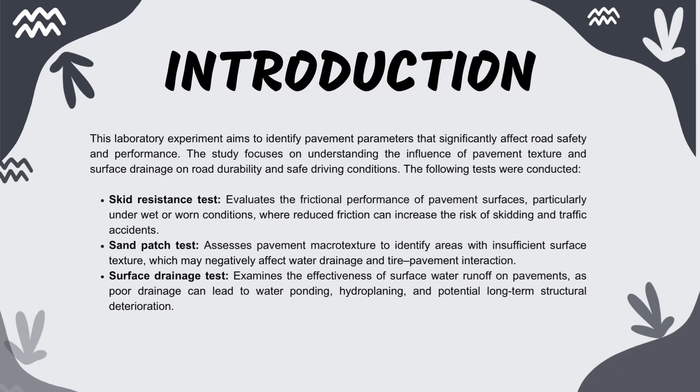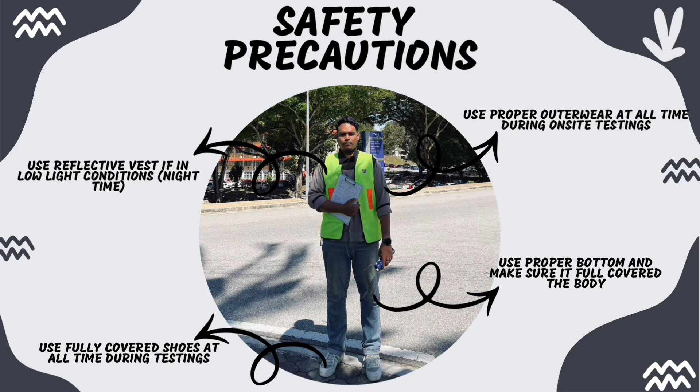This is a British pendulum tester. We start with leveling the arm of the tester and ensure the bubble is at the center.

Firstly, we need to calibrate the tester. Before we begin with our test, ensure the needle reaches 0 first.

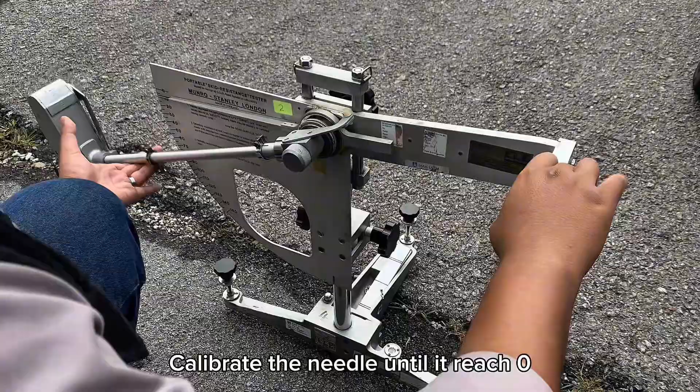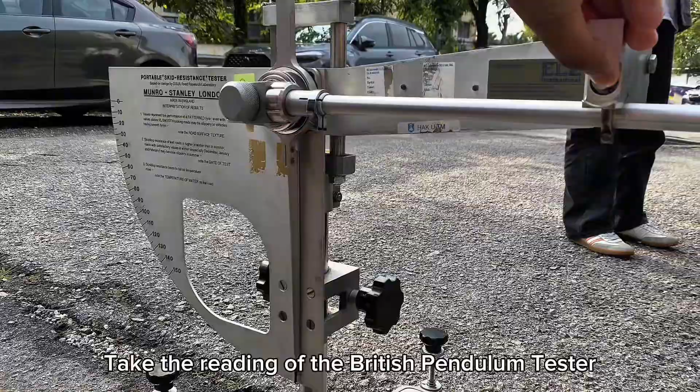Use the ruler to adjust the height level of the arm so it touches 3 points. We start with taking the reading of the British pendulum tester for 3 times on smooth and dry surface. And for wet surface, we pour water on the smooth surface before starting our test.

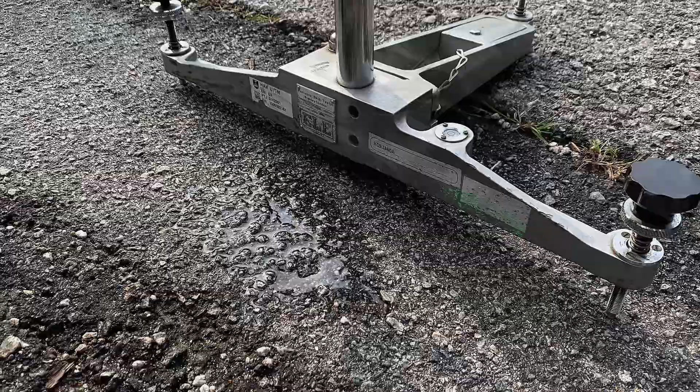We calibrate the British pendulum tester first so it touches 3 points. Release the slider rubber and take 3 readings on smooth and wet surface.

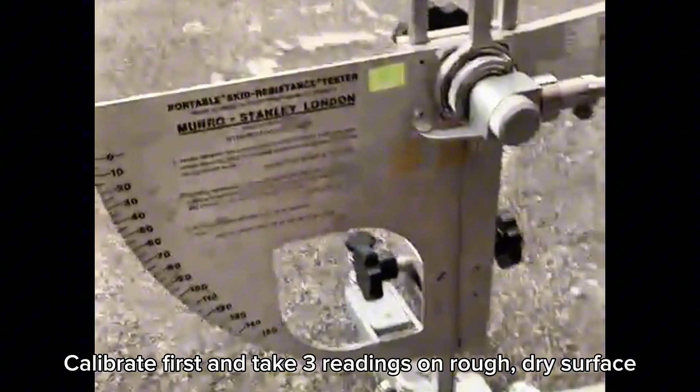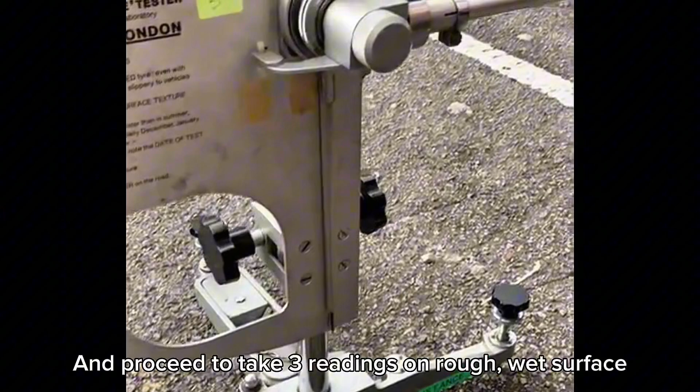Repeat the same step as in the smooth surface for the rough surface. Calibrate first and take 3 readings on rough and dry surface. Then pour water on the rough surface and proceed to take 3 readings on rough and wet surface.

The objective of this skid resistance test is to measure the skid resistance of different surface types. In this experiment, both smooth and rough surfaces were tested to understand how surface texture affects the skid resistance.

Next, the test aimed to compare the skid resistance performance of smooth and rough surfaces under 2 conditions, which are dry and wet. This comparison helped to identify which surface provides better friction and is safe for use.

Finally, the test is conducted to evaluate the effect of water on skid resistance performance by comparing the result between dry and wet conditions. The influence of water in reducing friction and increasing the risk of skidding can be clearly observed. This test helped to improve understanding of the importance of surface texture and condition in ensuring road safety.

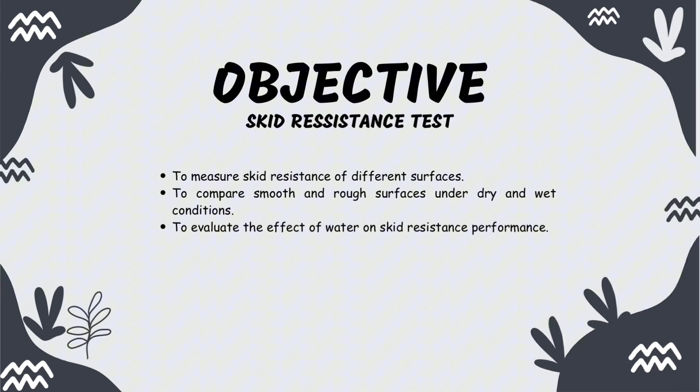By the skid resistance test, 4 surface conditions were tested, which are smooth dry, smooth wet, rough dry and rough wet. Based on the result, the smooth dry surface recorded an average skid resistance value of about 13.33, while the

smooth wet surface showed a further reduction to around 4.33. This value indicates very low skid resistance, especially under wet condition.

In contrast, the rough dry surface recorded a very high average skid resistance value of approximately 121.33, which is significantly higher than the smooth surface.

When the rough surface was tested under wet condition, the skid resistance decreased to about 74.33, but still remained relatively high. Overall, the results show that rough surfaces consistently produce higher skid resistance values than smooth surfaces under both dry

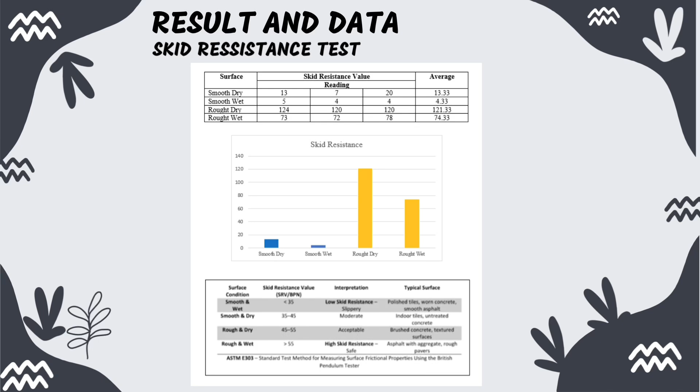and wet conditions. From the discussion, it is clear that surface texture has a major influence on skid resistance performance. Rough surfaces provide higher friction due to better surface texture, which increases resistance to sliding.

When the surface condition changes from dry to wet, skid resistance values decrease for both surface types. It is due to the presence of water, which reduces friction by forming a thin layer between the surface and the

test slider. However, the reduction was much more significant for smooth surfaces, making it extremely slippery under wet conditions. On the other hand, the rough surface still maintained a high skid resistance value even when wet, which is considered

safe according to skid resistance standards. Therefore, rough surfaces are much safer compared to smooth surfaces, especially in wet conditions, highlighting the importance of surface texture in road safety design.

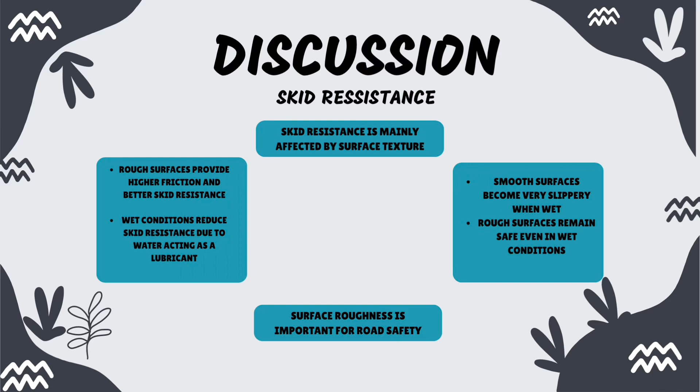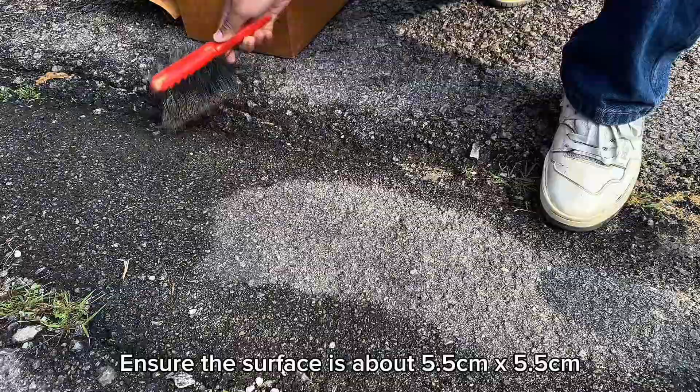So these are the apparatus used in this test. First, make sure the surface is clean by using a brush, and ensure the surface area is about 5.5 cm times 5.5 cm. Pour 25 ml of sand into the measuring cylinder by using a funnel.

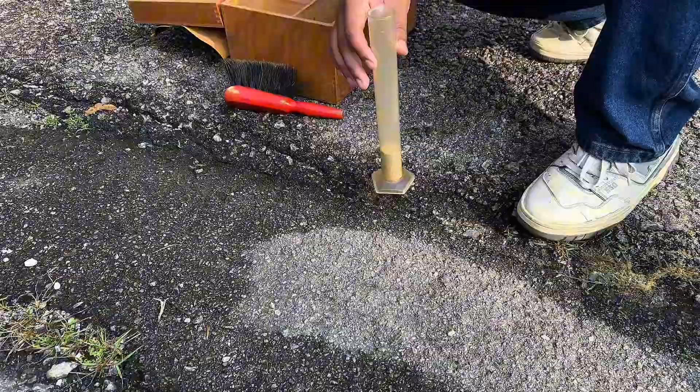Then, pour the sand onto the clean surface and disperse the sand in a circular motion by using the surface rubber.

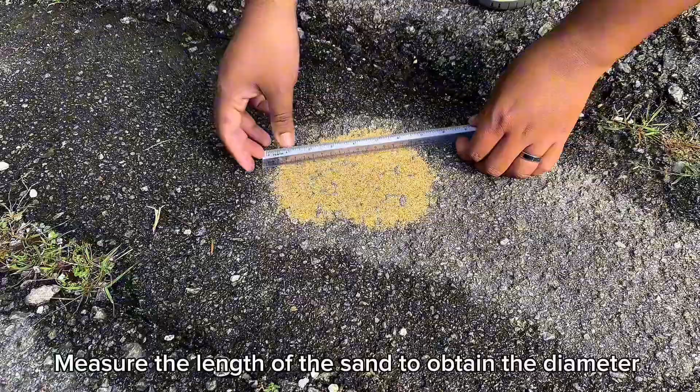And lastly, measure the length of the sand to obtain the diameter of the dispersed sand. Take 3 readings for average data.

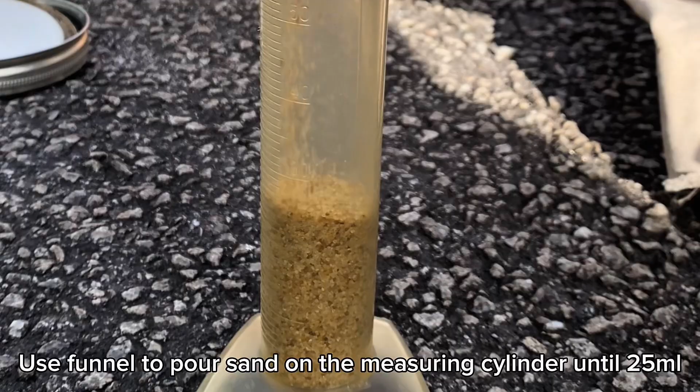For rough surface, we repeat the same step by starting off with cleaning the surface. Use a funnel to pour sand into the measuring cylinder until it is 25 ml. Pour the sand onto the clean rough surface.

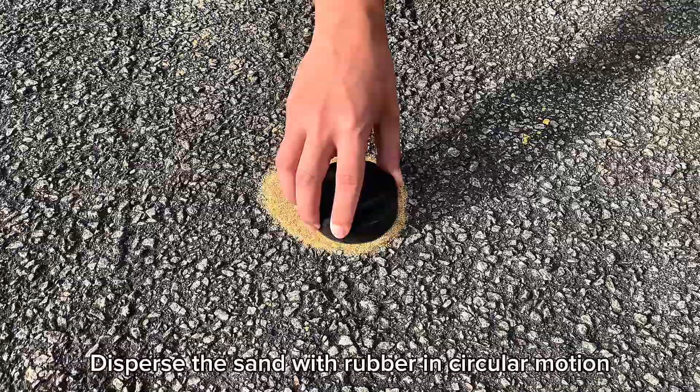Disperse the sand with rubber in a circular motion. We then measure the diameter of the sand, taking the average data for 3 times.

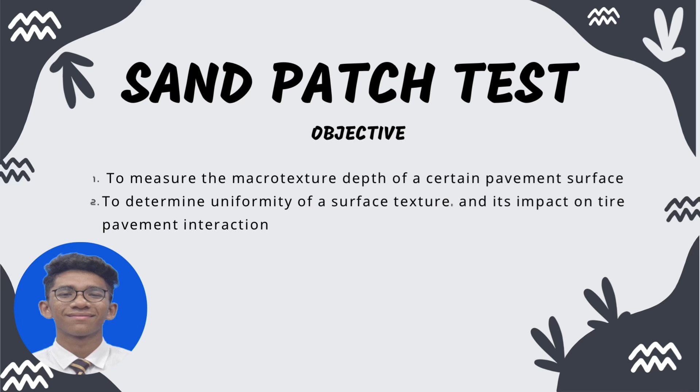Sand patch test. Firstly, objective. Objective number 1 is to measure the macro texture depth of a certain pavement surface. Objective number 2 is to determine the uniformity of a surface texture and its impact on tire-pavement interaction.

Next is result and data. So for the rough surface location, we use a volume of sand of 25 cm3 and the diameters are 17 cm, 16.5 cm and 15 cm, with an average reading of 16.17 cm.

For the smooth surface, we use a volume of sand of 25 cm3 and the diameters are 22 cm, 20.5 cm, 21.4 cm, with an average reading from the 3 tests of 21.3 cm.

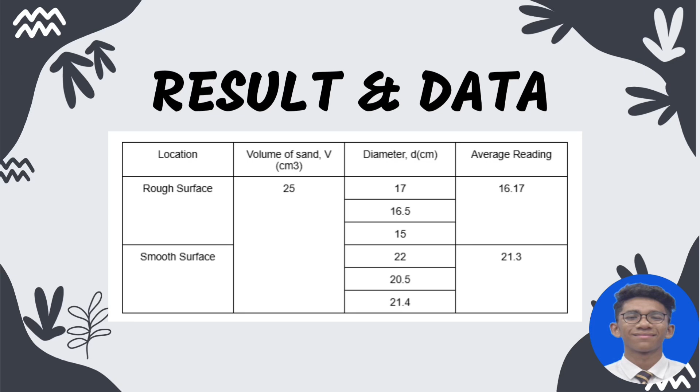Next, calculation of rough surface. So the average diameter we take is 16.17 cm, which is 0.1617 meter. We put it inside the mean texture depth (MTD) calculation, which is 4V over πD squared, and the result we got is 0.00122 meter, or 1.22 millimeter.

And then we compare it with 0.5 millimeter. So for rough surface, we got 1.22 millimeter, bigger than 0.5, which is the requirement.

Next, calculation of smooth surface. So we take the average diameter 21.3 cm, which is 0.213 meter. We put it inside the MTD calculation and we get 0.0007 meter, which is 0.7 millimeter.

And then we compare it with the minimum requirement, which is 0.5 millimeter. So 0.7 millimeter is bigger than 0.5 millimeter, so it meets the minimum requirement.

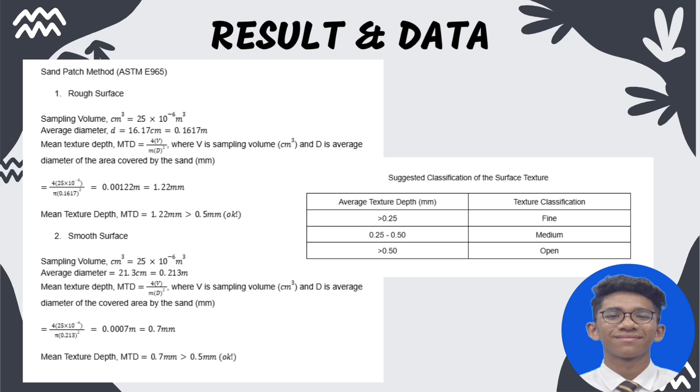Lastly is discussion for the sand patch test. So for the rough surface, MTD we got is 1.22 mm, which exceeds the minimum requirement of 0.5 mm. So it shows the texture is deep and correlates with strong skid resistance.

The rough surface gives better performance than the smooth surface due to higher texture depth. However, both surfaces meet the basic texture requirement.

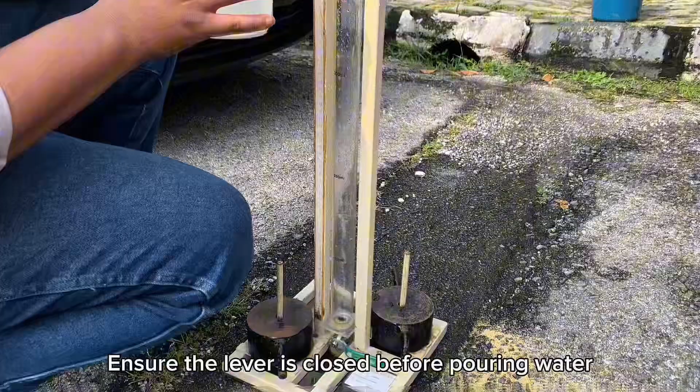Firstly, starting with cleaning the surface and placing the outflow meter onto the clean surface. We then ensure the lever is closed before pouring water into the outflow meter, pouring water until it reaches 200 ml.

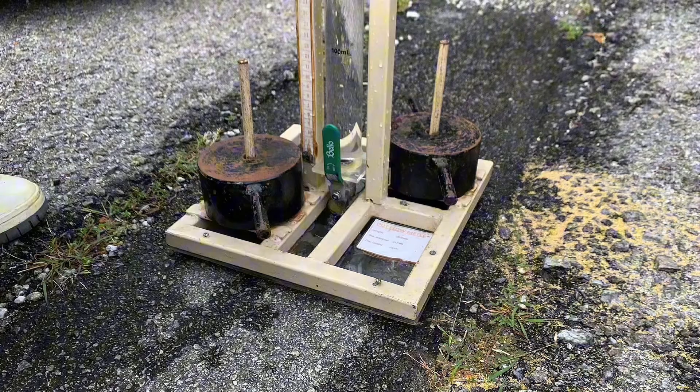We use a stopwatch to measure the time taken: release the lever and immediately start the stopwatch. Wait until it drains out, then close the lever and stop the stopwatch.

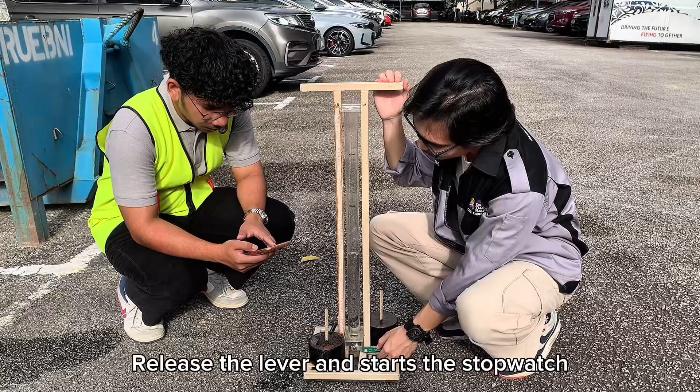We repeat the same step but on a rough surface. After the lever is closed, start pouring water into the outflow meter until 200 ml, release the lever, start the stopwatch, and wait until it drains out. Take 3 data points for average and for accuracy.

Objective for surface drainage test. First, to analyze the pavement efficiency in draining surface water. Second, to identify areas prone to water pooling which may lead to hydroplaning or pavement deterioration.

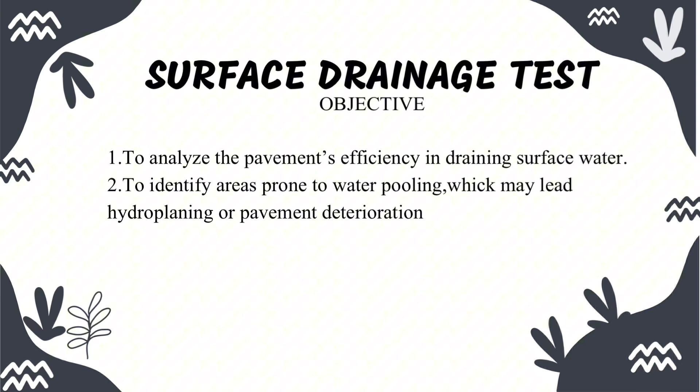The surface drainage test result clearly demonstrates the influence of pavement texture on permeability. Using a feed of 200 ml, the rough surface exhibits the most efficient drainage capacity with the shortest average time of 5.54 seconds and the highest rate of flow at 36.1 mm per second.

Conversely, the smooth surface impairs water flow, recording the longest average time of 8.34 seconds and the lower flow rate at 23.98 mm per second.

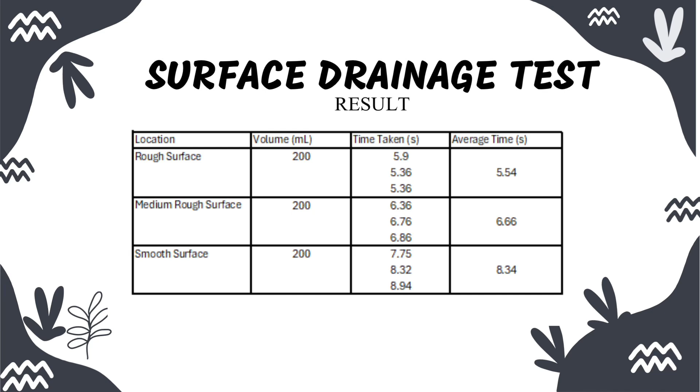The medium road surface fell between these values. This trend indicates that increased microtexture depth significantly enhances the pavement's ability to dissipate water, which is a critical safety factor for minimizing hydroplaning during wet conditions.

Conclusion: rough road surface. Rough road surface provides excellent skid resistance and effective drainage, meeting or exceeding the requirements of the Malaysian standard.

Medium road surface is generally acceptable. However, its performance is marginal, with potential safety concerns under wet conditions. Smooth surface fails to meet the required standard for skid resistance and texture depth, particularly during wet weather, which may pose a safety risk.

Safety recommendation: to improve road safety, it is recommended that road surfaces maintain adequate texture depth and skid resistance in compliance with all existing relevant standards.